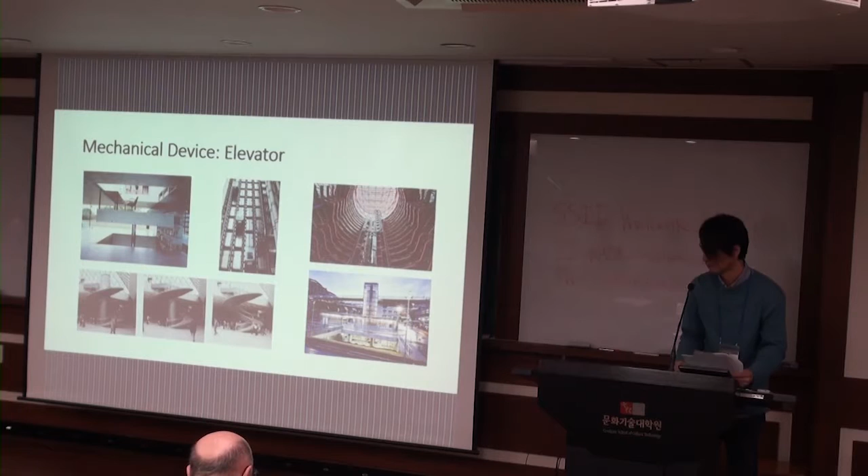We explained the formation and diversity of the three-dimensional space and examined the possible new value of the vertical communication of the modern square through architectural mechanical devices.

For example, slope, steps, and elevator to overcome levels and discontinuity in old cities. There are three cases like Piazza del Campo, the Spanish Steps, and also with elevator, Elevador de Santa Justa in Lisbon. Those are very famous and also very interesting places to see, for sightseeing and also some particular urban promenade.

In modern times, these examples show architectural and mechanical elements ensuring particular three-dimensional continuity in our contemporary cities. Those elements engage in a variety of dynamic activities in our everyday life beyond simple horizontal two-dimensional movement.

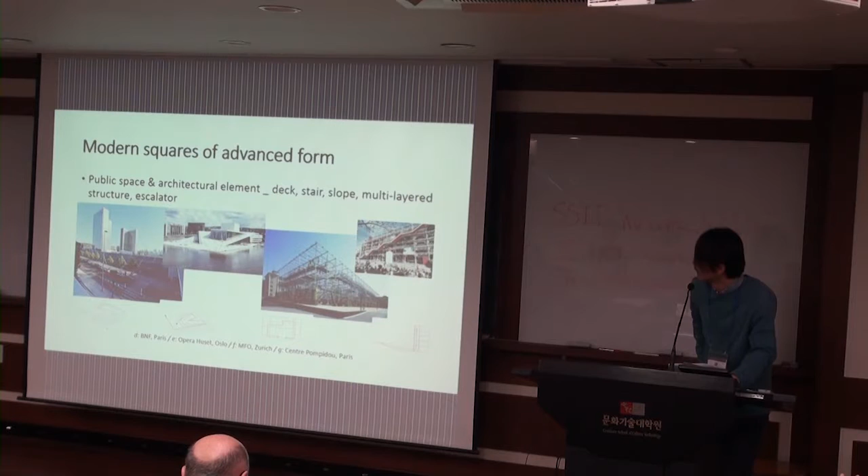With expanded steps and endless slopes within a three-dimensional structure, and also in front of a building with a plaza, we can use a very dynamic escalator. For example...

Lausanne Flon case study, based on public space and mechanical devices. Here we can find the particular topography with the first image. The city is like a topography.

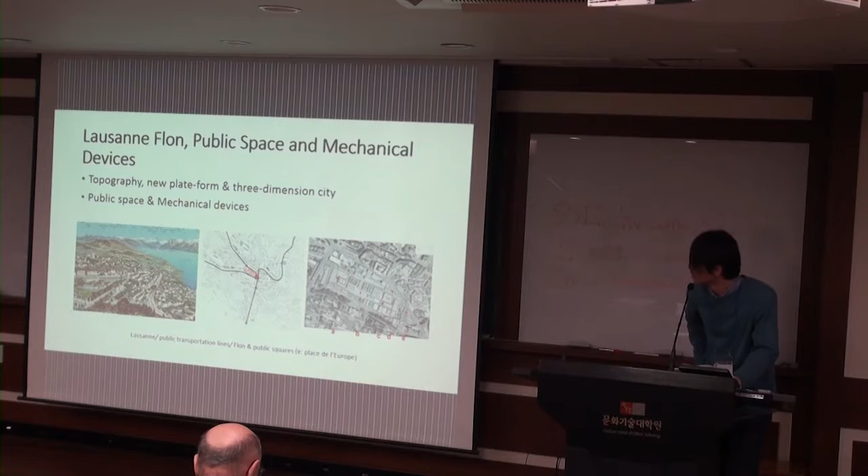There is a very particular transportation system concentrated on one point in the center. And also this place was occupied by box-type warehouses during the industrial period. And now this is like a commercial area.

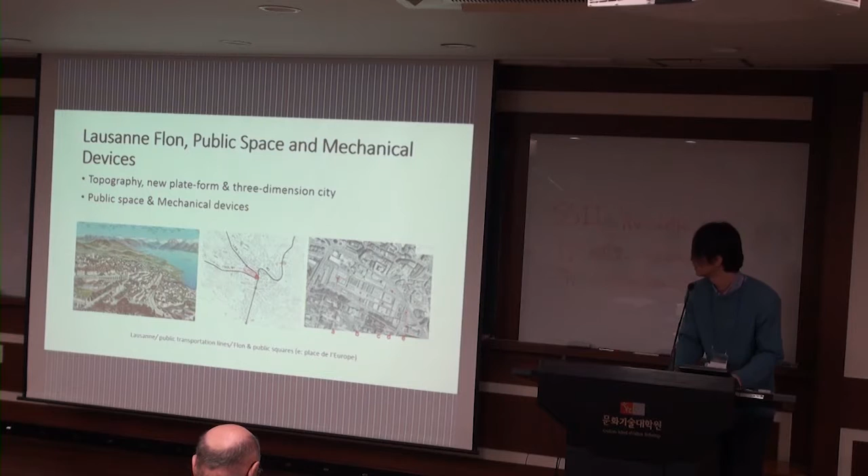The Flon is characterized by 30 meters of underlevel from the city ground level. Beside the change of space organization, it still has to overcome different levels and develop other different types of mechanical devices. Because of the different levels, the people have to use different types of mechanisms to go up and down.

This was a blueprint project for the development of the city of Lausanne. Bernard Tschumi proposed 4 different types of bridges. It continues and also connects the different levels, and they have different types of programs.

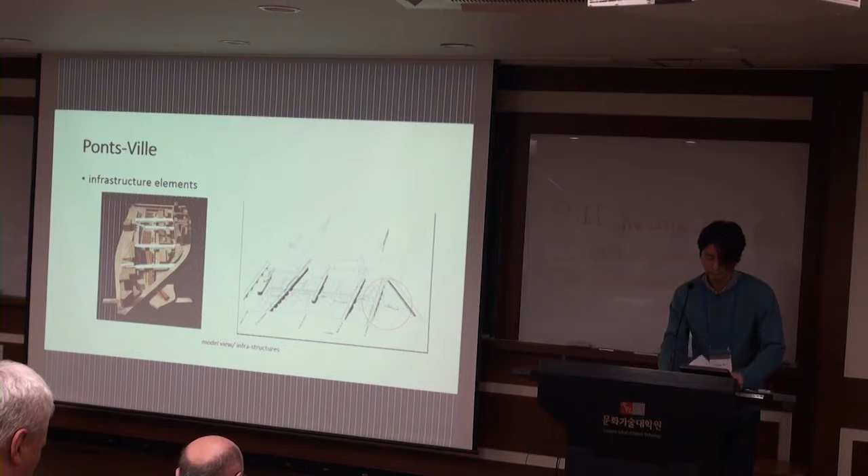The first part, the triangle-shaped place, was realized today. And also, the Flon-Ville project for administration and other complex programs, and other successive urban public spaces in Flon, was developed.

Like 5 different types of public places you can see in the slide, and the last one is the main site, Place de l'Europe.

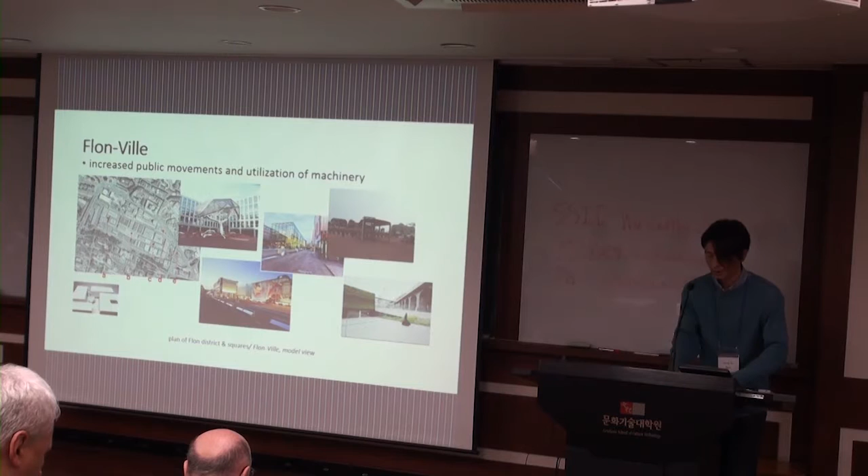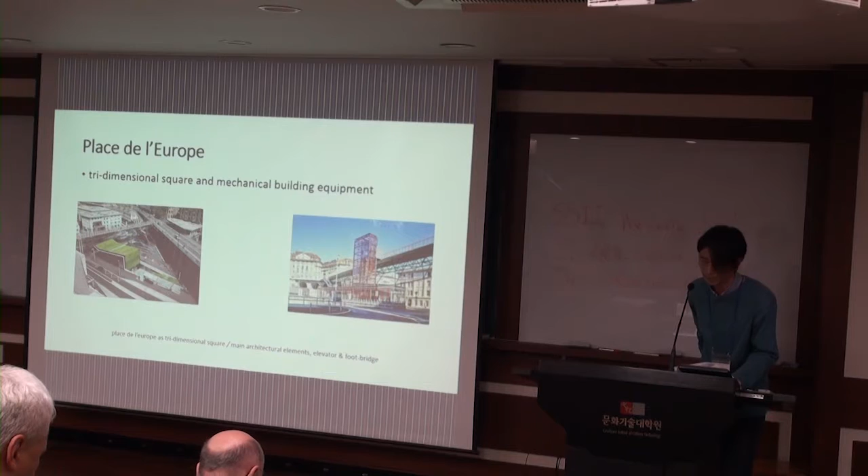Like the image, you can see the particular shape of the place. It represents a particular type, like a three-dimensional square. It could work very efficiently with the transparent building shape, like the main elevator system, and also with the footbridge, a suspended footbridge connected by the elevator.

First, you can distinguish the shape of this place, like a triangle shape. So I can show you a different example, like a Place Dauphine in Paris. This one is very traditional as a square, but the shape is very particular, like a shell shape of a triangle.

And the case of the Flon is almost a right-angled triangle. This shape makes different types of fluidity and connections, also different types of activities with this volume, not just plane. For example, in the first case, you can see this almost triangle surface with surroundings, for example, with residential buildings, and on the left, for example, the ground level is occupied by commercial systems.

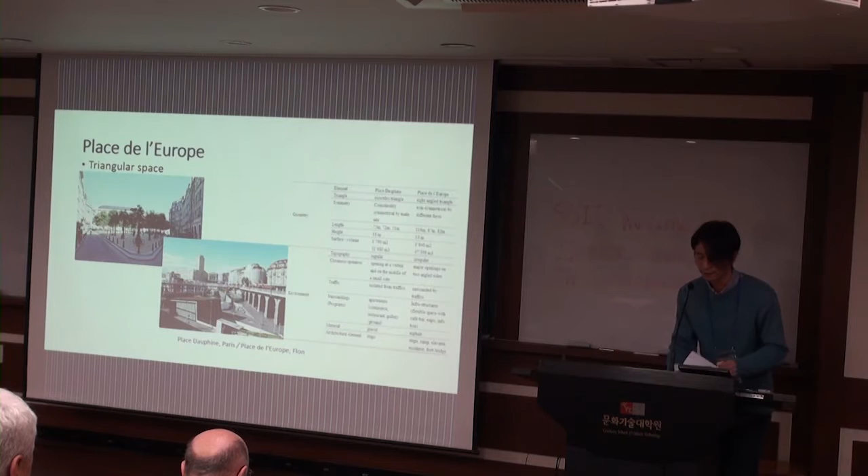Those are related to the history and culture of the cities. To maintain three-dimensional space, factors like endless pedestrian and traffic flows, control and location of main vertical devices, and openness or closeness of borders could be very important.

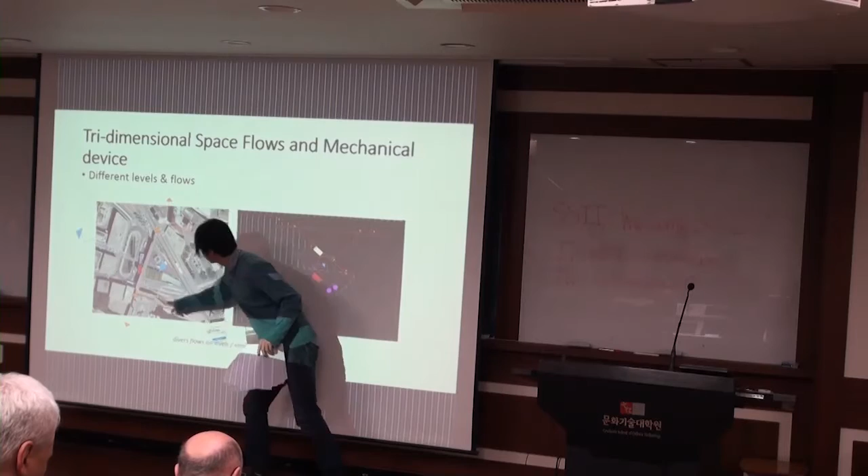For example, in the first image we can see this suspended footbridge connects two other circulations, making a long, endless circulation on the upper level. There are two different levels and different types of circulations.

Finally, this elevator building makes the connection vertically. If we imagine there is no vertical system, those three levels of circulation couldn't be fluent, and people can't use these systems.

At each level there could be more different types of movements, but they can't connect. So we can distinguish that vertical movement was very important.

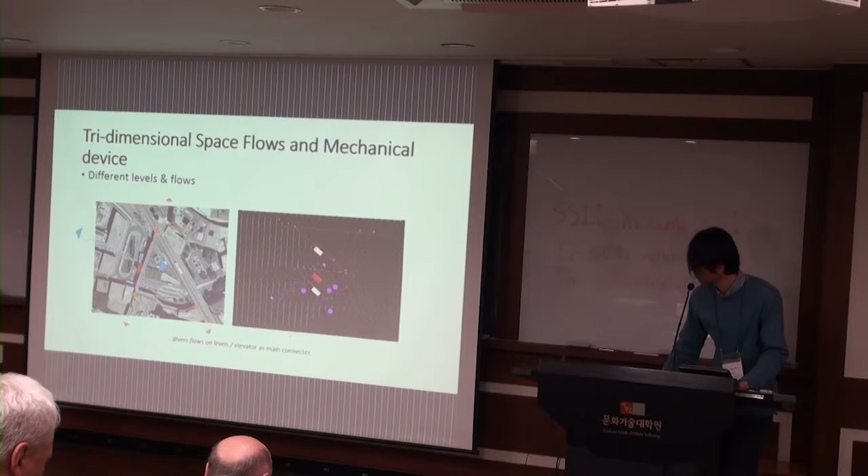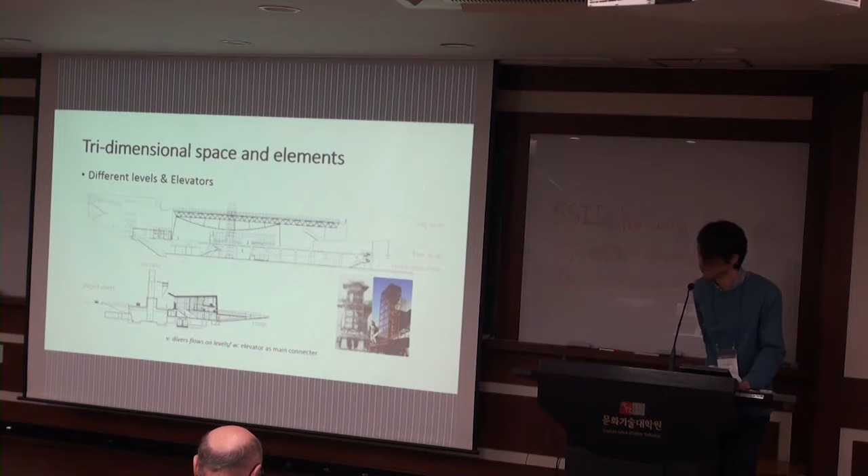Those are the sections and some images of the elevator. Originally, we can find other forms of elevators. For example, in 1900 an old elevator tower already existed, but now it has been renovated and we use other images of the elevator.

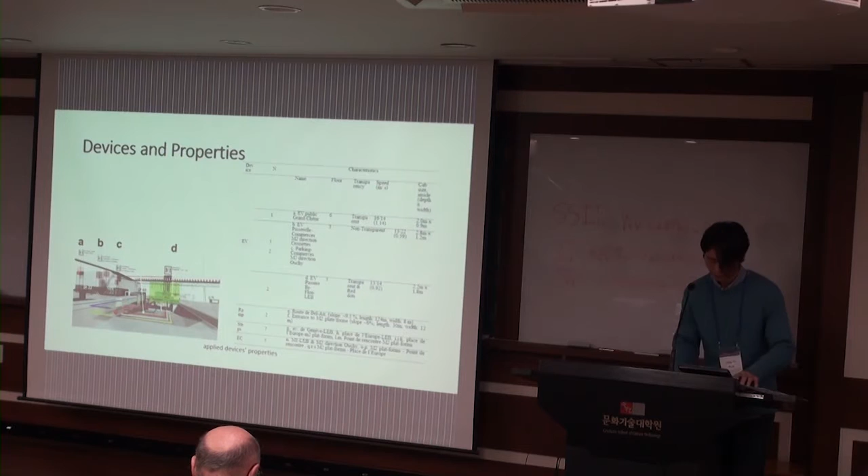Here we can compare the properties of mechanical devices like elevators, ramps, and escalators. We can also see the size of the inside cab, the speed, and different shapes.

In the case of elevators, we can find four different types, and the main elevator in the middle of this place was very important.

If we look at the size of this elevator, normally there are many users with bicycles and also some wheelchairs for disabled people. So the depth was more than 1.8 meters, and the width of this elevator is very wide, almost 2.2 meters.

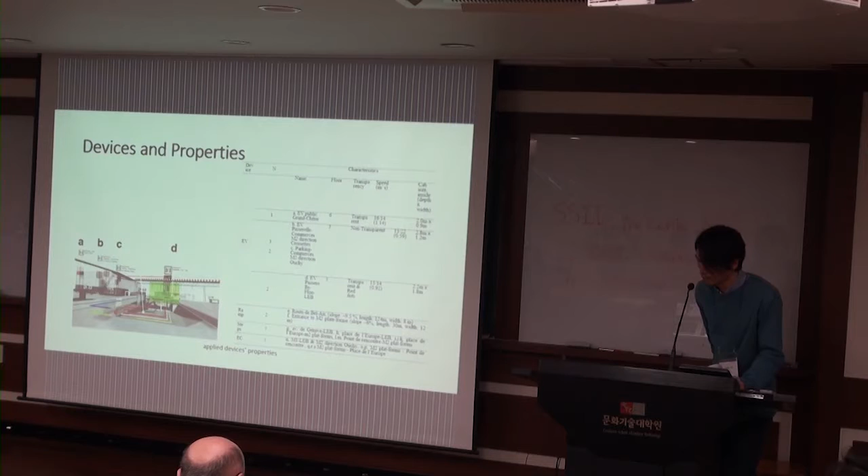In order to describe the characteristics and functions of this elevator in the public sphere, we introduced some issues and parameters based on the following problem.

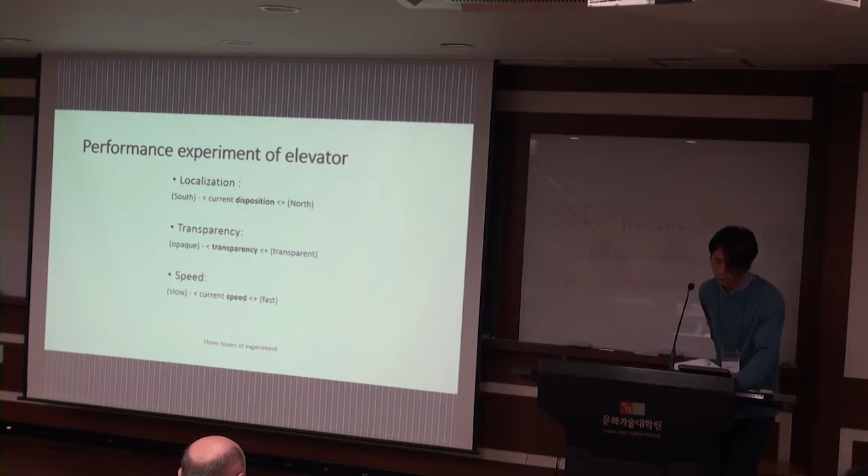Here we locate the main mechanical device. What kind of visibility does it allow? Is it efficient in terms of corresponding speed, quality, etc.?

And then we can test it by moving the elevator from north to south, or change the transparency from opaque to transparent, and also test it by changing the speed of the elevator.

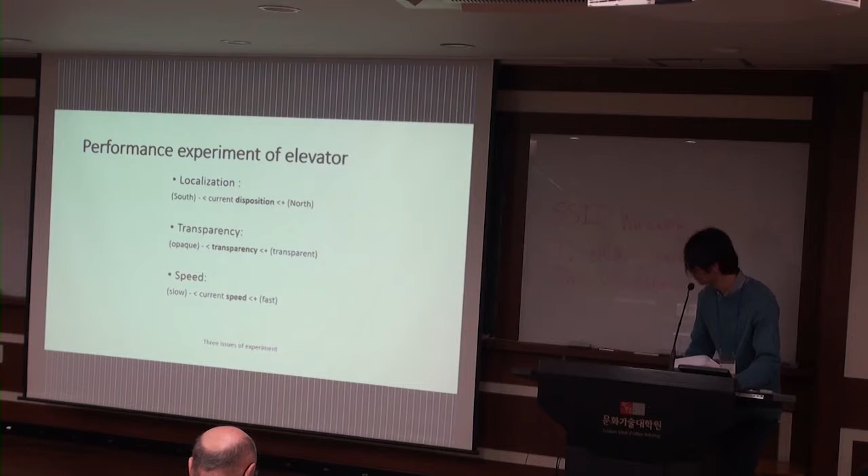For example, the first case is with localization. When we locate the elevator on the south part, middle, or north part, the visibility for people using this elevator will change.

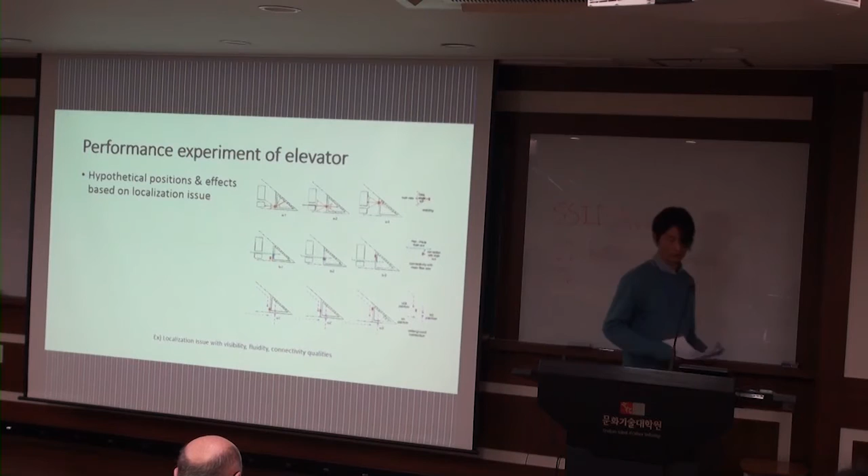In that case, the last one is very difficult to gain quality sightseeing, but the south or middle part can get very interesting sightseeing.

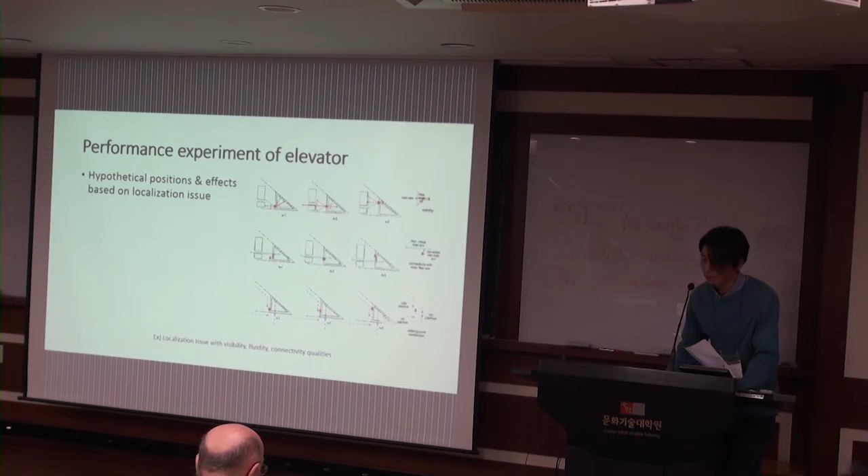In other cases, we can also compare different connections with mainstream or underground transport systems like the metro, for the people.

Those are some descriptions of categories and parameters to compare and evaluate the quality of the elevator. For example, for localization we can put three parameters: visibility, fluidity, and connectivity.

We can also compare different types of mechanical devices like ramp, escalator, and elevator. In those cases, we can evaluate the quality of the elevator in the public space.

But anyway, we have to describe and use more categories, develop more categories and parameters to know the more exact quality of the mechanical devices. This was just the first test, so I have to develop more categories.

Three points will be revealed for the application of a three-dimensional multi-layered structure. For example, the ring-type circulation system on the upper level and connection with existing networks on each level was important. Completeness of vertical or diagonal devices for efficiency and pleasure was important.

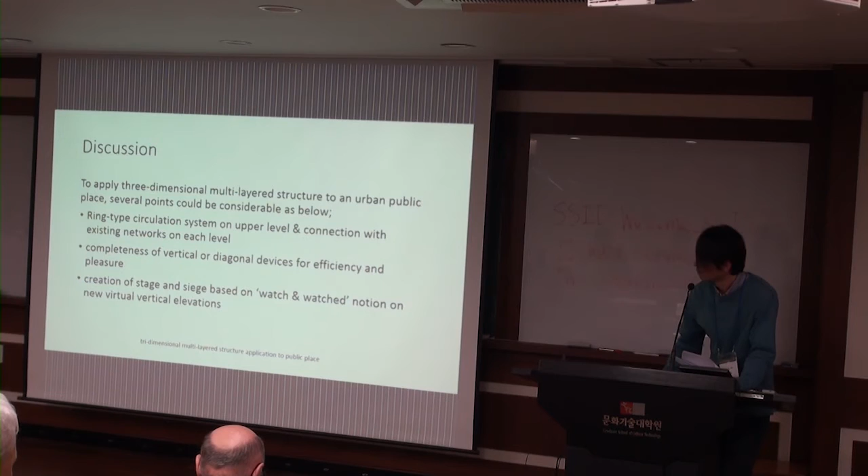So this is very useful mechanism to gain a sightseeing point, sometimes in hidden places where otherwise we cannot see or don't go outside. So mechanical devices help to discover different types of sightseeing.

Those are some descriptions, more description for the conclusions, but you can see it on the text.

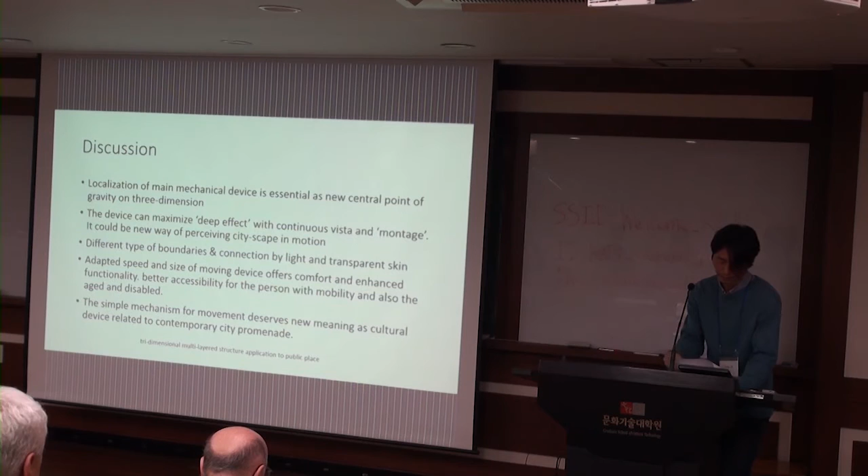Mostly I would like to introduce other things, several other issues for the application. First, the evaluation category and parameter structuring problem was important, so we have to develop more categories.

There's also the database problem, for example, in the category of speed and size of the elevator in other public spheres. Comparison in several cases was necessary, but in this case just one case was examined. To gain generality, I think we have to compare more public places with three-dimensional space, and different types of mechanical device analysis and evaluation will be required for the next step.

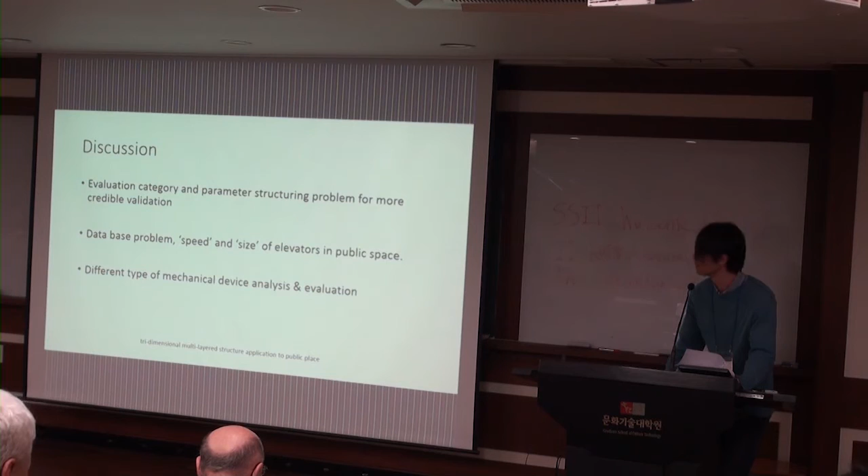In the case of the escalator in Paris, the three-dimensional sphere type is very similar to previous cases. So, yeah, I would like to finish this presentation with one more point.

The physical environment, like topography, is also something very important to know or develop in our analysis.